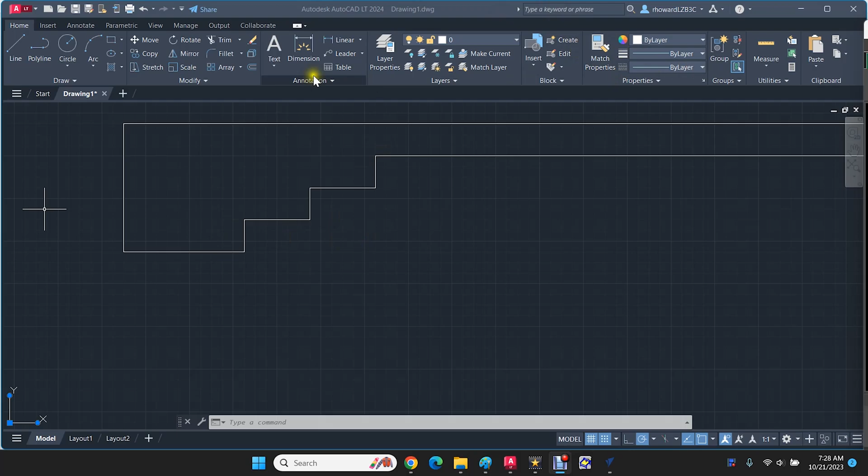Okay, so we're going to continue with the drawing process, and I've stepped away for about 48 hours. So what I want to do first is dimension these so I know where I'm going to put my guidelines in VCarve, actually. Let's take a look.

Dimension. Okay, so I've got 11/16 on that. Then I know I've got 3/8 there. Drag that down a little bit.

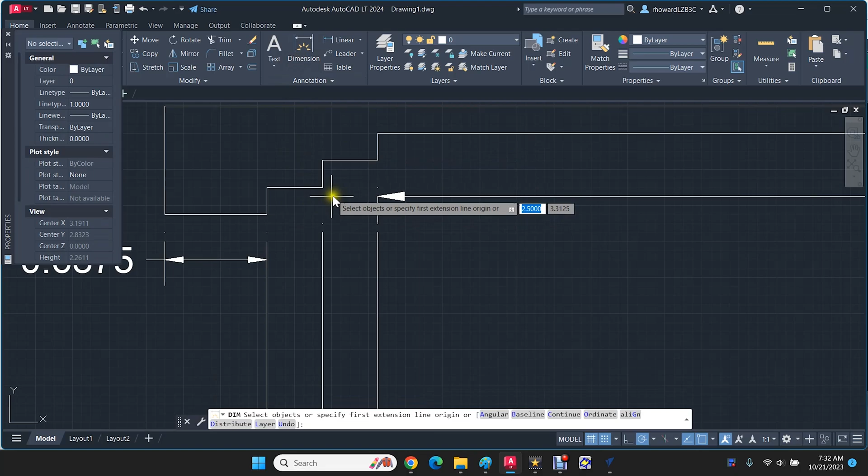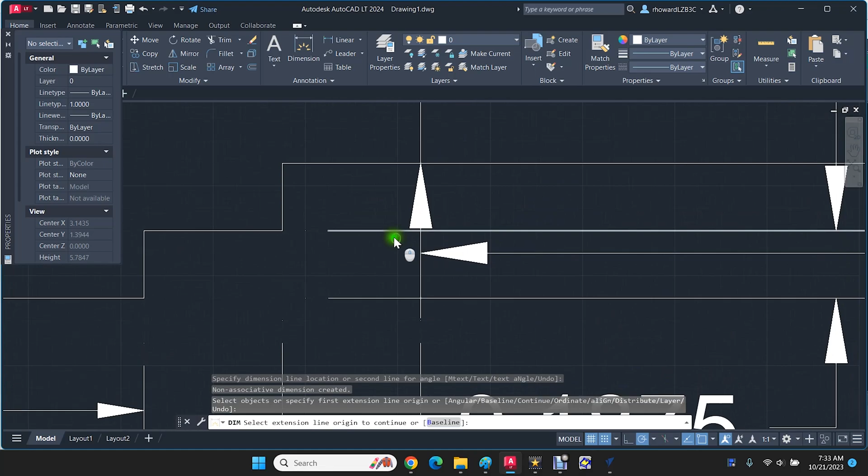You'll have to forgive this garish drawing, but it does reasonably serve as evidence of what's happening, even though this stuff's a bit goofy. Let it be known that I'm not a quick user of AutoCAD, but nonetheless it does allow me to see my dimensions, even though it's a sloppy drawing. Nothing a little practice wouldn't take care of.

So we know that we've got a 3/8 offset everywhere. We've got, in the horizontal steps, the vertical steps are going to be 3/16. Okay, so here, here, and here. That allows me to visualize what I did because I haven't touched this in 2 days.

Three-quarter thick, okay.

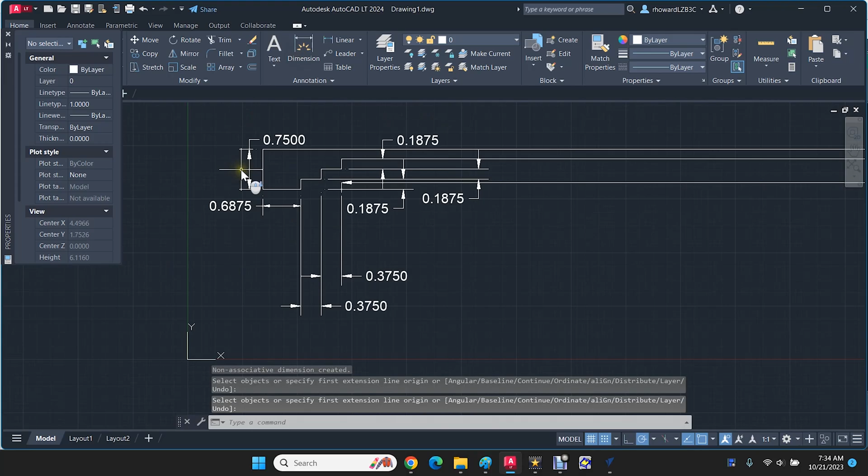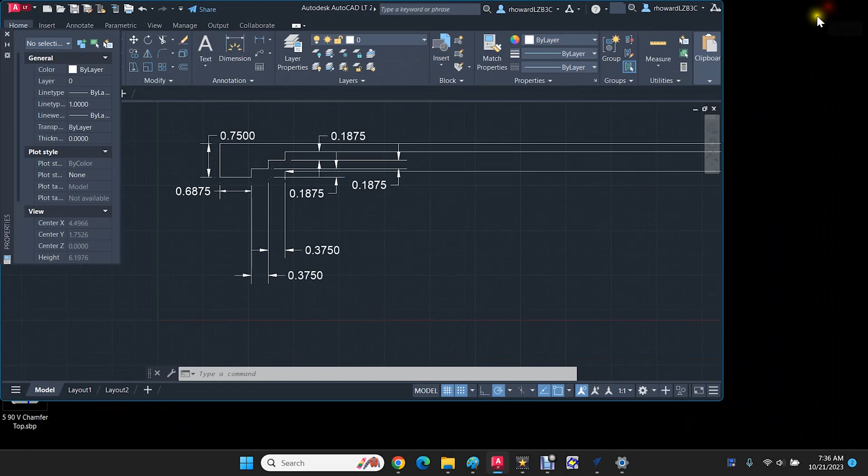Okay, now that we've got this, we have kind of an idea of what these dimensions are going to look like. I'm going to take the AutoCAD and simply move it, and we'll pull up VCarve, come back to our drawing. Okay, so the thing to do now is to draw guidelines for where our pocketing tool paths are going to occur. So if you recall, we're going to bring a guideline here to 11/16, another one here at 1 1/16, 1 7/16. And it'll be really easy to do that because of our relative-to-guide trick.

So we're going to click, I'm just going to focus in on one ceiling tile because my intent is to copy once I build it once. So we're going to create a new guide, relative to guide, and we're going to offset it 0.6875, create new guide. Okay, that gives us the first guide.

Now I'm going to create two guides that are going to be offset 0.3875. What my intent is with that, to bring AutoCAD back over, is I've got now a guideline here. I'm going to create one here and here for those two guides. So create new guides. And there they are. Close. So this is our outside profile. This is our first guide.

Something's not good on that one. What do we do there? Let's study this. Something doesn't seem to make sense. This should be 3/8.

So here's our first. Let's create another one. So this dimension is 11/16. Let's create one more. Well, first of all, I had the dimension wrong. It's not 0.3875, it's 0.375. Boy, that'll make your finished product wrong. So 0.375. Oh, you know why? Because what am I doing? Am I referencing off the original guide? That's the problem.

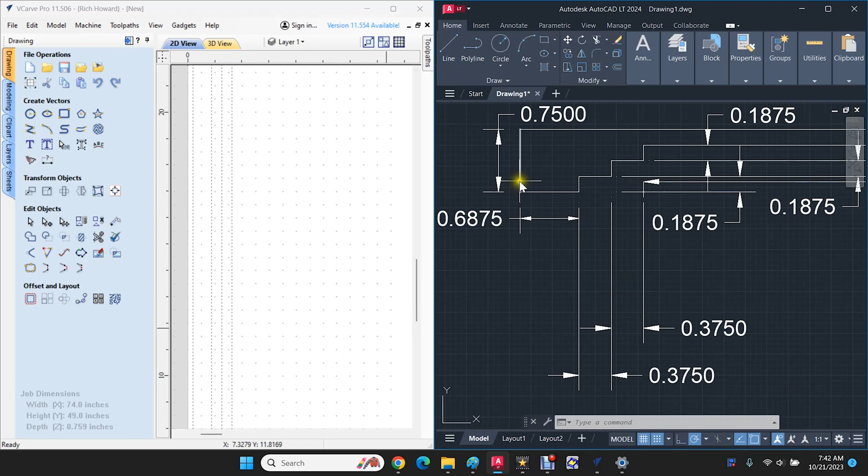I've got a guide for here. I've got a guide for here, here and here. I've got a guide for here and one for here. Okay, awesome. So now what we need to do is to do that on this side here.

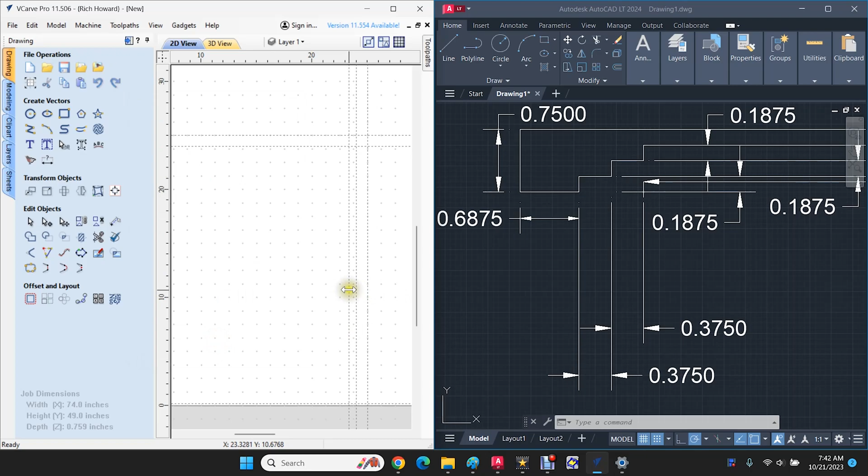Now this time, relative to guide, quantity 1, we're going to enter negative 0.6875, create new guide, close, because I'm not doing the math in my head to offset them from the original guide by the additional amount. Relative to guide, quantity 2, negative 375. Create new guides. There they are.

Is that right? Yeah. Wait a minute. 1, 2, 3. Yeah, we should have 4. Perfect. Close.

Okay, so now we need to create those same guides from this vantage point and from this vantage point. You can turn on and off the guides by that little button up in the top. So let's get to that.

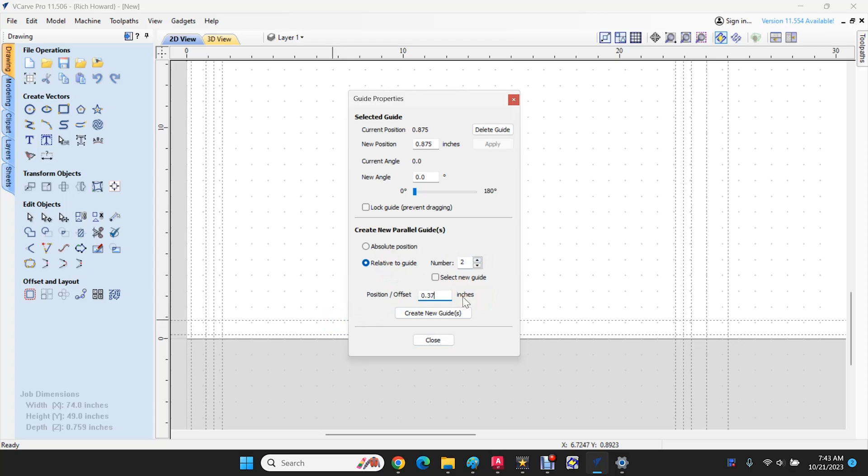Let's create new guide, relative 1, 0.6875. Create new guide. Perfect. Close. Relative to guide quantity 2, 375. Create new guides. Awesome. Close.

Down from here. So relative quantity 1, negative 0.6875.

Oh, you know what? I think you can do simple math in this. Let's try it. I think it needs to be parenthesis, minus 0.375, close parenthesis, equal. Yes, that worked. Create new guide. I guess that will only work one time. Or actually, I can take that sum, home, parenthesis, minus 0.375, close parenthesis, equal, create new guide. Ah, okay, yeah, that worked.

Yeah, I saw that in a video somewhere, not online. Let me check that with our measuring tool here, just so I have a level of comfort that I did that correctly. I've never done that before. Yeah, that looks right, okay.

375, so I'm getting that in the upper right-hand corner, is where I'm getting that. And then this one, yeah, perfect. That worked. So now what's neat is I have guidelines for the first cell completely, and they're partially done for the second cell. My intention is to copy polylines, so I'm not going to draw any more guidelines.

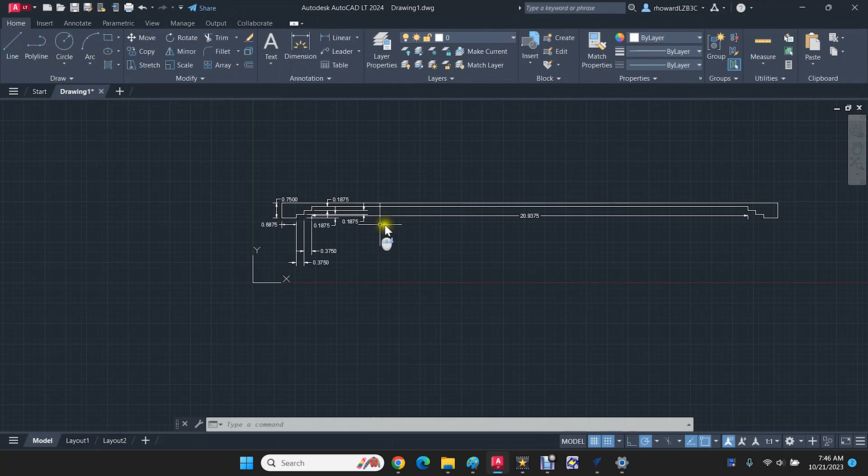And in fact, I could easily get rid of the rest of the guidelines, but just don't see a reason to do so. So what my intent is, we're going to create 3 pocketing tool paths. I'll do the inner one first. What I mean by that is I will do the inner path, the inner pocket first, from the material surface down here, which dimension is 9/16, if I've got that correct. Yeah, 9/16.

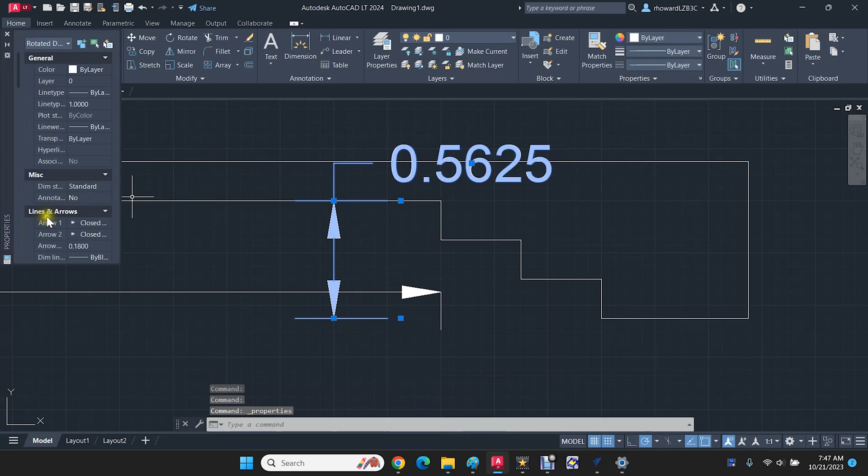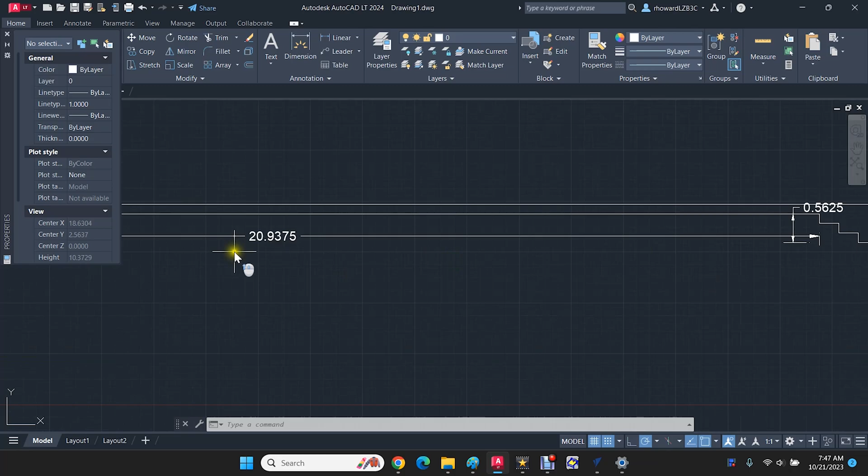And what I did earlier was properties. I made that a little bit smaller, 0.125, and then offset. That's less confusing, I suppose. So I'm preferring to pull up these dimensions. So I know that my pocket needs to be 20 and 15/16 by 9/16. So when I get that drawn, I can confirm that with my dimension tool here over to here, upper right-hand corner, indeed 20 and 15/16. Then from here,

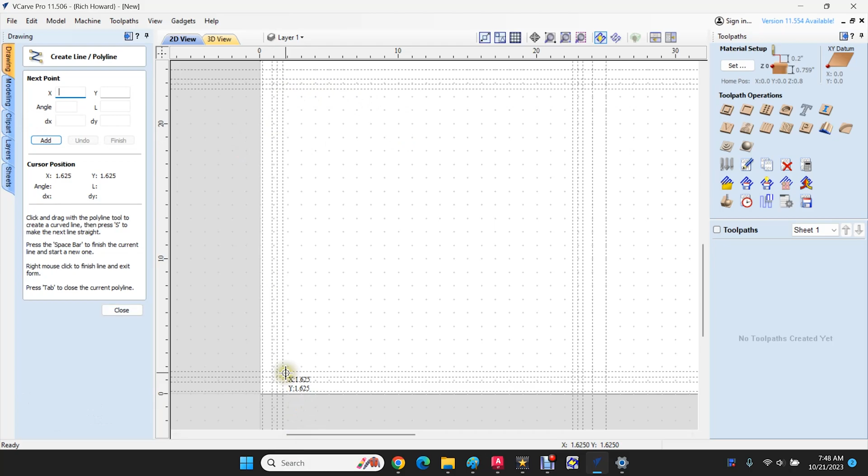There's a way to keep the tool active, I believe. Yeah, it's square. And of course, the height I can't judge here because I'm doing this in 2D. So what we're going to do is pull up the toolpath tab. Let's pin that. Let's create a pocket toolpath. But first, of course, I've got to create a vector. So we're going to draw a line, polyline. I'm going to start down here because I'm going to want it to start as close to 0,0 as possible. And...

Go here. I've been told, get good at scrolling, zooming in and out. Right mouse button exits out of there. So now I should turn off the guidelines. Now I've got a vector that's closed. Awesome. So now from here I can create a pocketing toolpath.

I don't want to use a 3/8 end mill. What I'd like to use is my surfacing bit. I didn't buy it for this purpose, I bought it to T-slot items, but I'm finding that it works. It's an Amana 45662, and I'm going to see if I have this in my tool library. Select surfacing end mill. Yeah, I do. Amana 45662, inch and 3/8, cutter diameter 1 and 3/8, 2 flute, pass depth is 50 thousandths, step over, 18,000 RPM. That seems awfully fast.

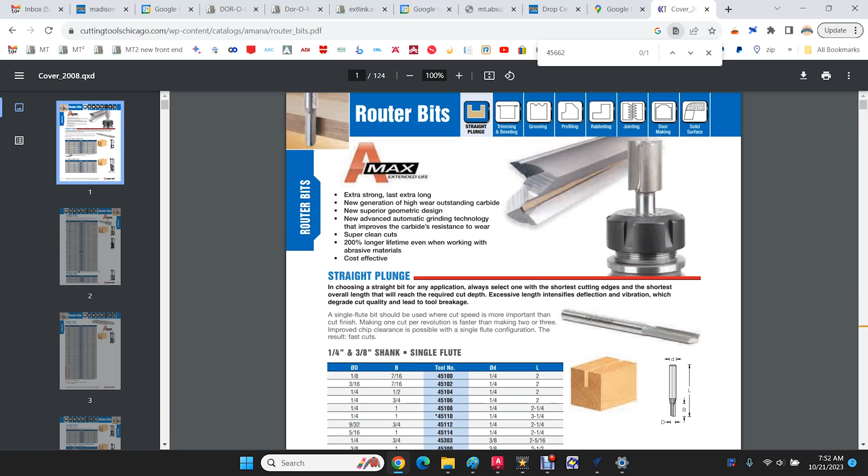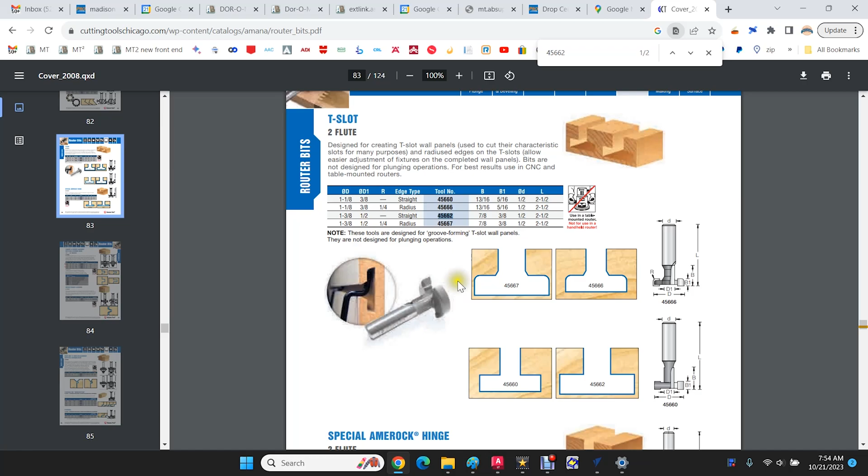Four, 5, 6, 6, 2. Yeah, that's my concern, they're not right for plunging. Because of the shape, it can't plunge. I may be able to have it ramp in, but I'm not comfortable having it nowhere to ramp. Well, you know what we'll do is we'll play with it. Let's see what happens. But the point of that exercise was, what's the RPM?

I'm going to abandon the idea of using this bit, because when I use it to surface my spoil board, what I'm doing is I'm starting off the edge of the spoil board, I'm not starting on top of it. And because this item is not, it's not going to plunge because of its shape, that's the problem. And what I mean by that is, you can see in the design it can't plunge, but it's not going to work. So we're gonna keep our end mill.

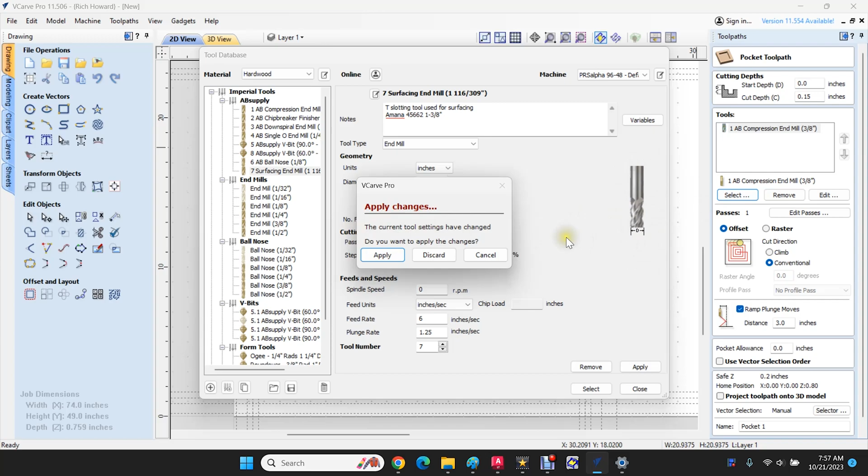I don't know if I have a larger end mill, and the reason I'm thinking about the bit is I don't want to be here till the 23rd century. I just don't have a half-inch diameter end mill, so the 3/8 end mill is what we're running with. Had I thought about this beforehand, I would have brought in a larger bit, is what I'm driving at. Because I'm going to be pocketing with a 3/8 bit, and I've got 20 and 15/16 on the first pass, so discard. We're going to leave that.

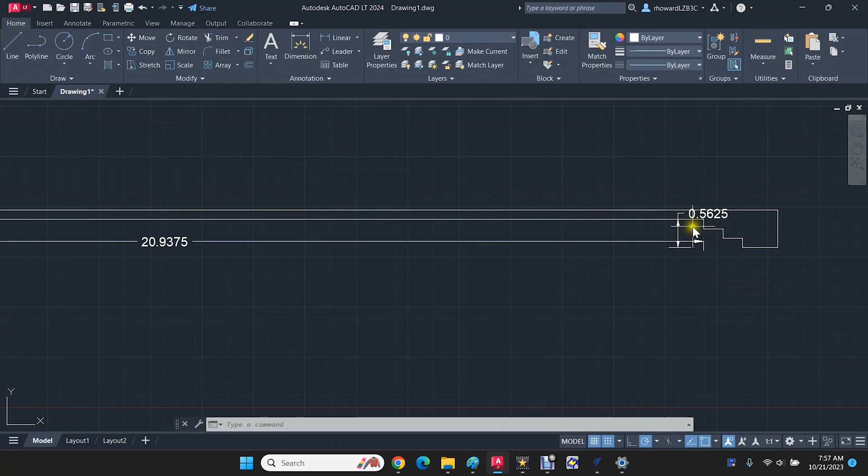Now our start depth, we'll make that 0. Our cut depth, now this is where AutoCAD comes in again. If you recall, I could be doing it on a calculator, but it's 9/16 of an inch. So we're going to make this 0.5625. Yeah, we'll raster cut that.

Plunge, ramp, plunge moves, 3 inch, okay. Safe Z is 0.2 inch. Yeah, that would be fine. Now, it's defaulting at 2 passes. I don't think there's any reason to change 2 passes in MDF.

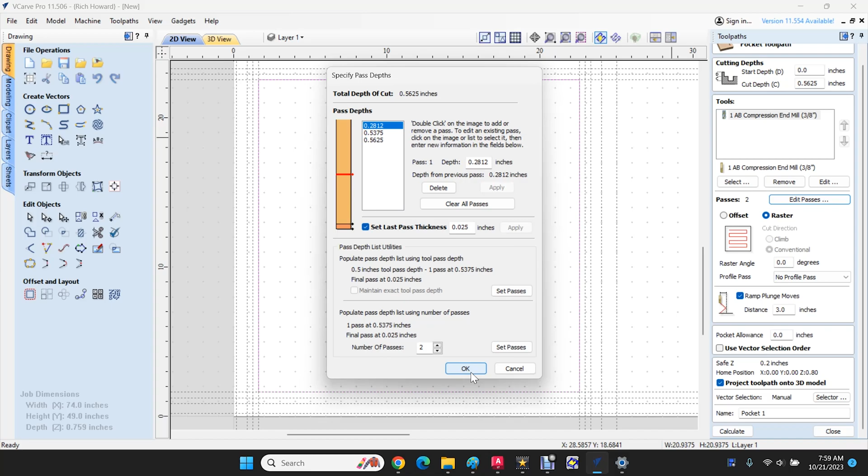So what I'm doing is setting a last pass. It's my understanding that a last pass is going to potentially make it cleaner. I've not experimented with that, but we're going to do that now. Pass 1 is at 4, 8, 9/32 of an inch. We're just going to experiment, see what happens. But I'll put a clean last pass on there, which is basically 25 thousandths.

So we'll say pocket 1, inner, we'll call it, and calculate. Yeah, looks about right, speed that up a little bit. So it's doing the first pass, obviously, second pass. Third pass, and I sped it up even more. Okay.

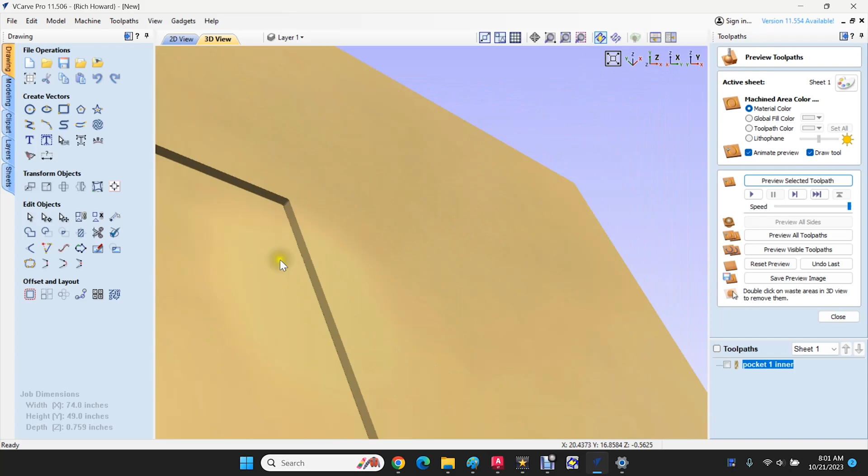We're going to have a radius corner, obviously, 3/16. I did think about a smaller diameter bit to give me a tighter corner. I just don't think it's going to be a problem. If I don't like the design of what this is going to be, or is not what the client wants, so to speak, we'll make a modification. I'll do a tool path with a much smaller bit, then come in and pocket the rest. We'll see.

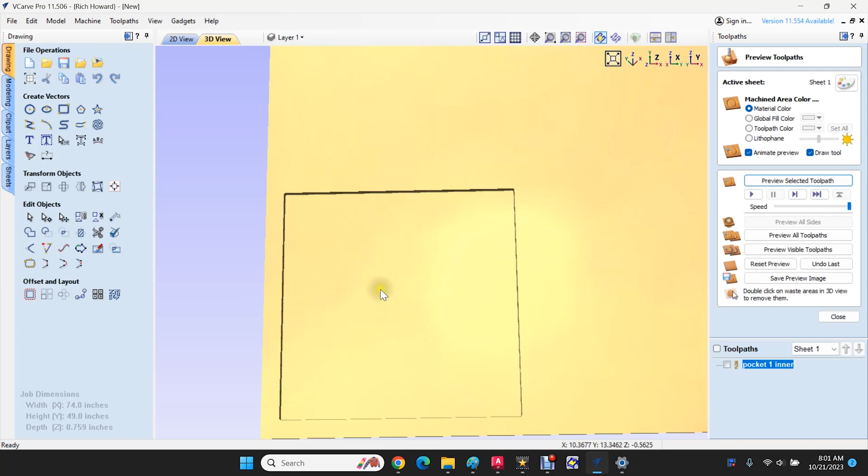So what you can see here is in this area, when I put my mouse over it, you can see where the mouse is in relationship to the X and Y, but also in the Z, it's saying negative 0.5625, 9/16. So that's exactly what I wanted to see. That looks like it's going to work. That's the first tool path.

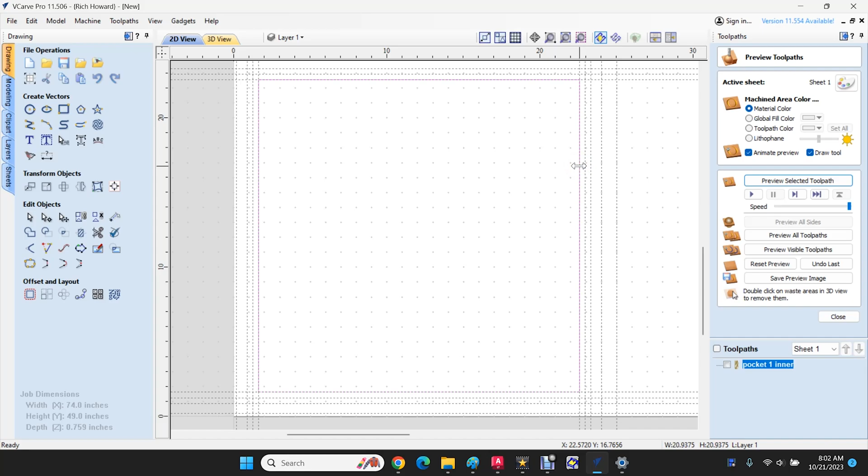Now we'll go back to the 2D view, and we're going to draw another polyline. Well, that's not what we want to do. No, we're doing this in reverse order. So what I mean by that is we're doing it backwards, in the sense of I don't want to do the inner one first. I want to do the outer one and go only down to the 3/16 step, and then continue to step in, and then give a last pass on the third innermost pocket.

So this tool path is wrong. If I did it in this order, I would pocket all of this, then I would be air cutting the majority of the second step. So it's okay, it's just simply a delete this, just simply an exercise. I still have my vector, and that's okay. I'm going to leave the vector.

Let's actually delete the vector. Okay, so let's start over from the outermost pocket, which is going to be here. 1, 2, 3. Okay, so let's do that.

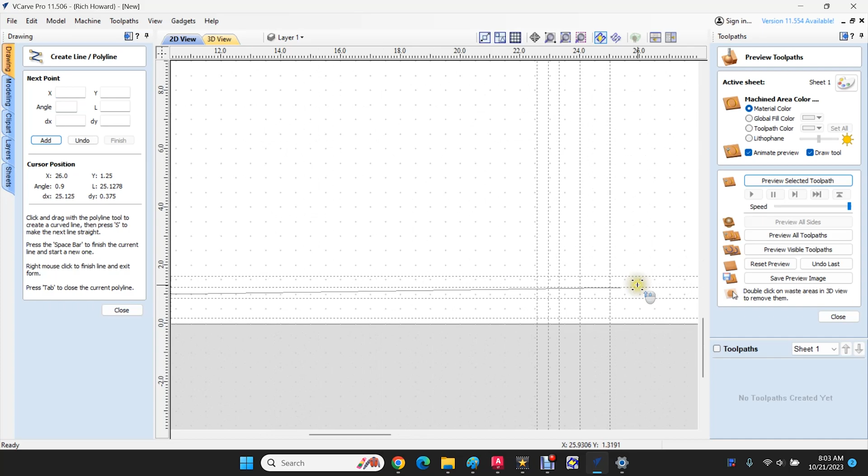Nope. Node editing mode, bring it up to here where it's supposed to be. We're going to have to check these lines to make sure I've got them in the right location. Turn off the guides. I'm going to select these and I'm going to group them. I'm used to typing in group. There it is, okay, so I've grouped that.

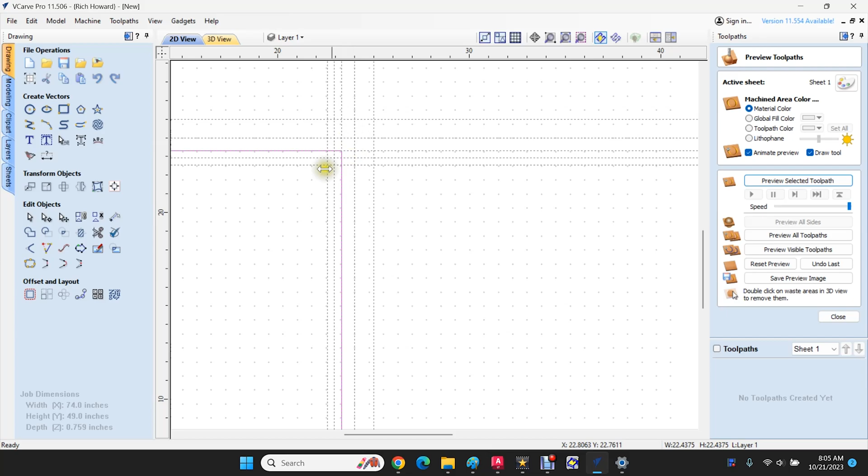Okay, that's fine, so now we have a vector. Let's throw our guidelines back on. Yeah, looks good. So we're going to draw the 3 stepped pocketing tool paths, and at the end we're going to draw the profile, which we will use to cut the piece out of the solid piece of MDF. So let's draw, well, actually, no, let's close that.

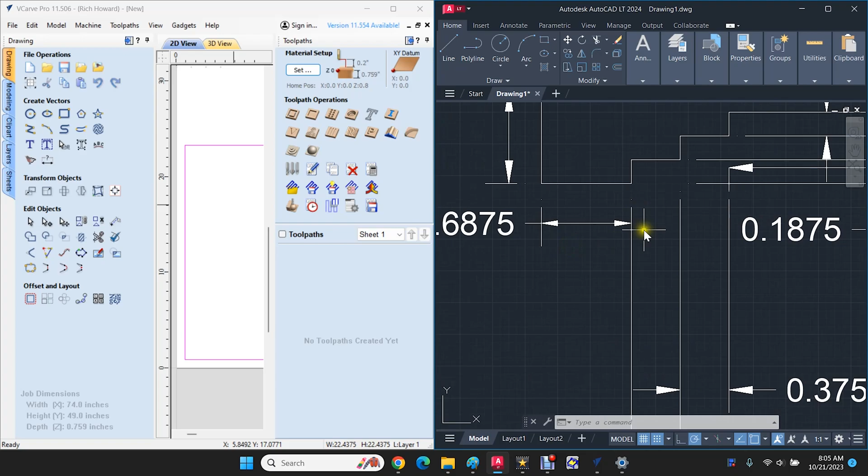Let's do our pocketing toolpath. Now, this is where we have to think about, we'll have to have AutoCAD back up so I remember the dimensions. Okay, so we're on the outer unit. We know that we're going to go 3/16 down, and then we'll have to get a dimension on how wide that pocket's going to be. So let's dimension that, it's going to go from here to here.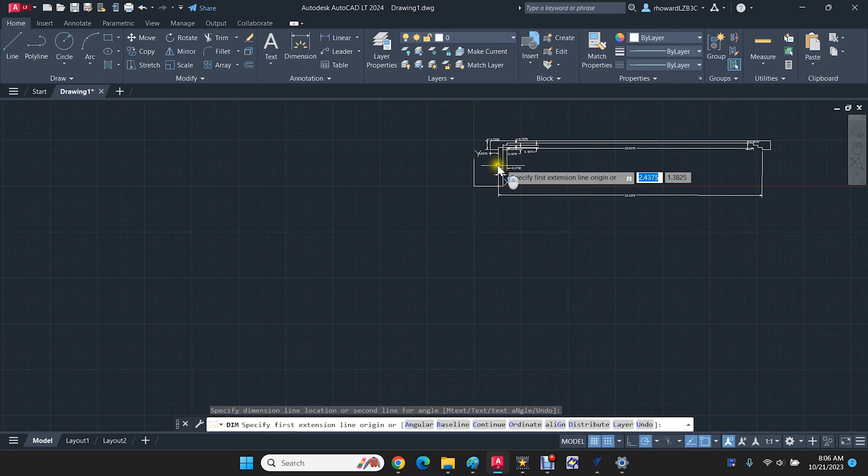Drag that down. 22 and 7/16 is what it's going to be. Actually, I don't have that lined up really well.

Yeah, we got it. 22. Yeah, 22 and 7/16. It was giving me a dimension that wasn't exactly what I expected. But yeah, so it's 22 and 7/16 wide and 3/16 deep.

So let's put that aside, literally. We've got our vector highlighted. Let's pocket a toolpath. The cut depth is going to be 0.1875. One pass is going to be perfect for this, I think. We're going to raster.

Outer pocket. 22, 7/16, by 3/16. I'm going to name it that. I'm not sure why I'm putting it in imperial and metric or decimal. Outer pocket. Okay, calculate.

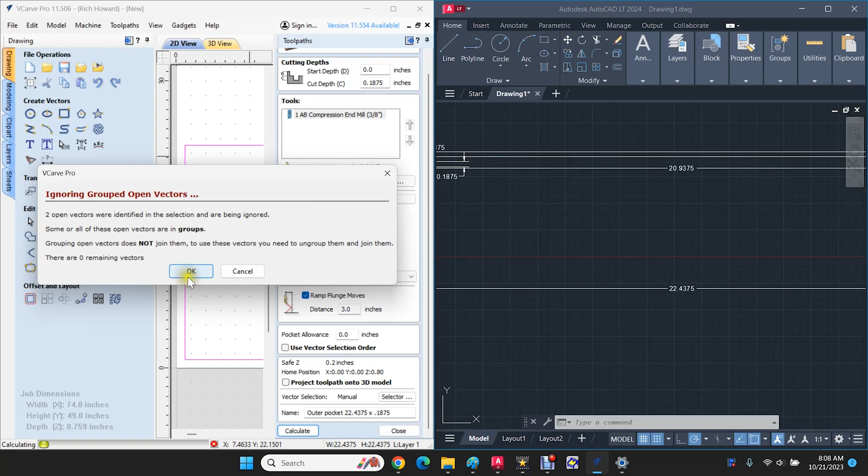2 open vectors are identified in the selection are being ignored. Some or all of the open vectors are in groups. Grouping open vectors does not join them. Okay. Yeah. Okay, so let's take a look.

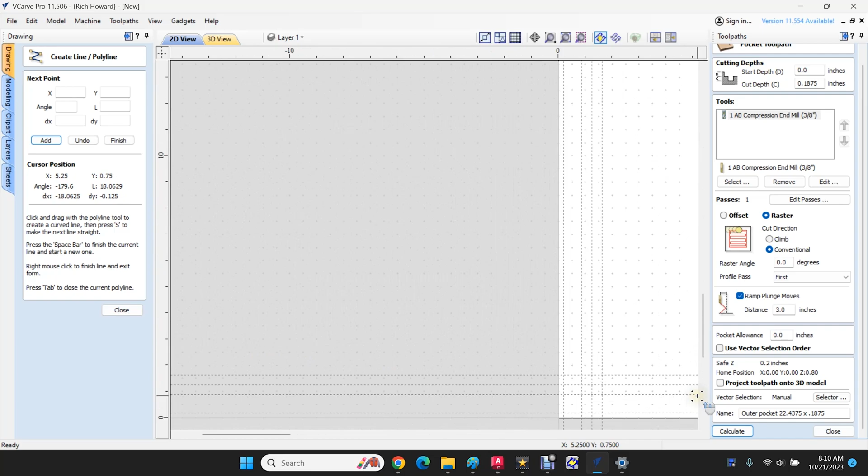Let's just redraw it. Okay.

Yeah, this 24, and then it was... I pinched that guideline by mistake. So that's going to be 11/16.

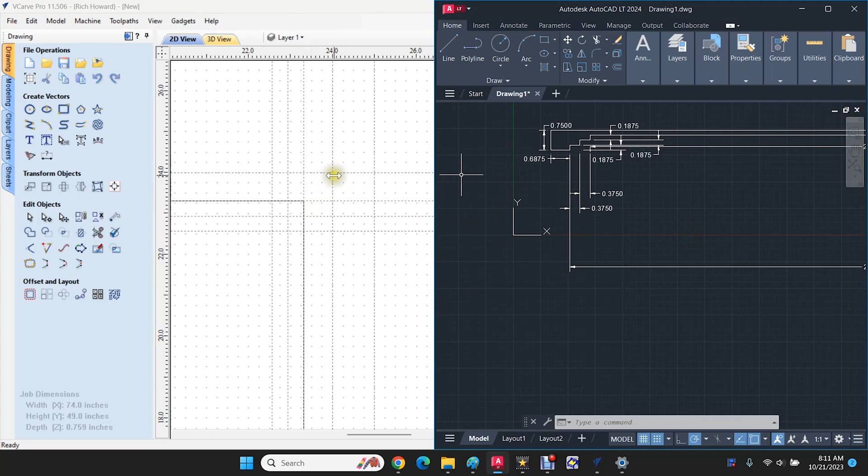So that guideline needs to be 23 and 5/16. Right mouse button, 23, 3125, apply. That didn't work.

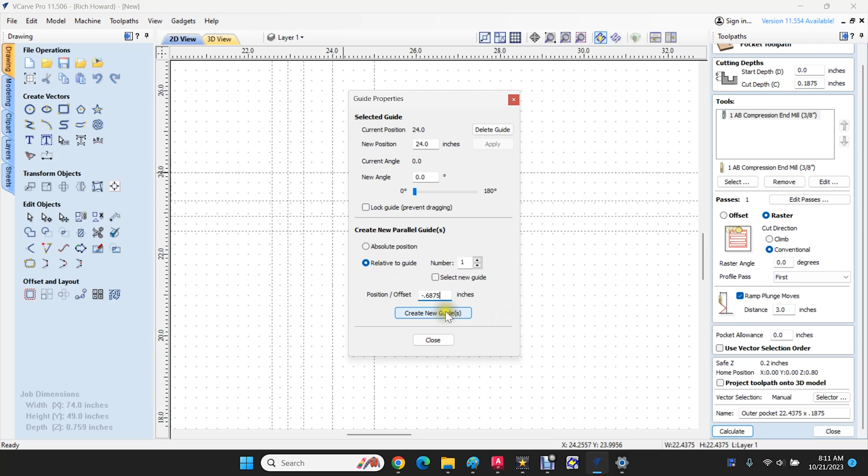Relative minus 0.6875. Okay, I see what I'm doing.

I actually have the guide already there. Relative 23.3125. Close.

Okay, I've got guidelines for what I'm doing. Okay, so let's back to where we were. When I undid the operation, I undid the vector that I drew, or the polyline.

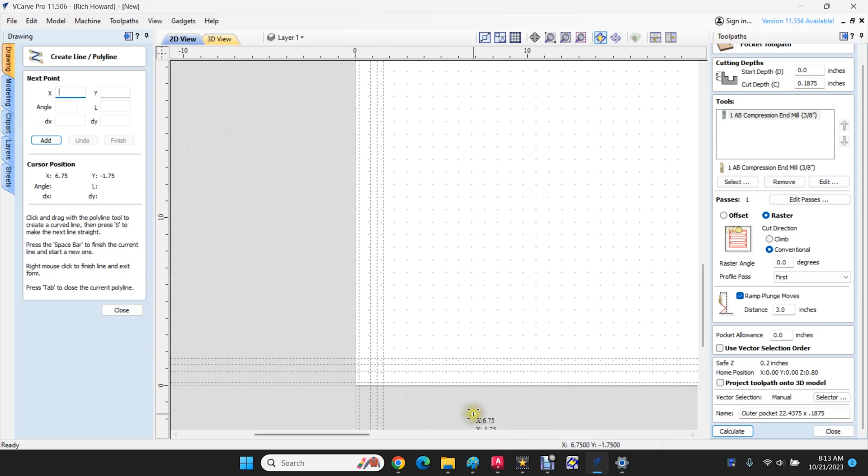So let's draw a polyline. Let's get to here, to here. Okay, we've got a polyline. Looks like it's in good shape.

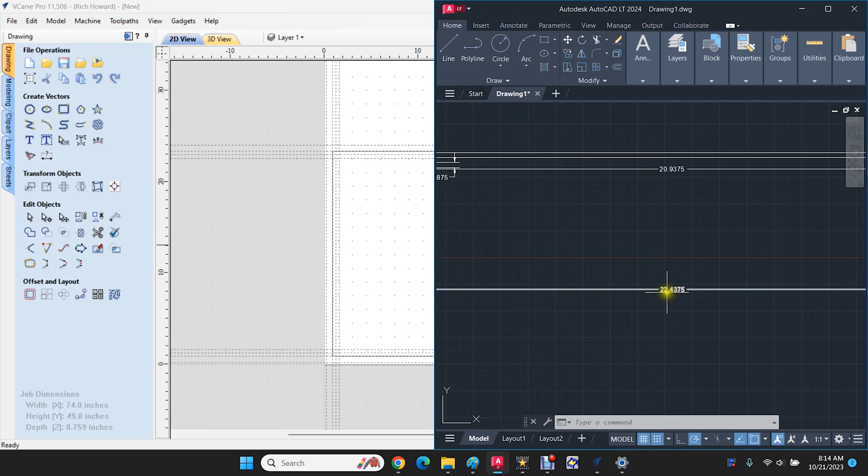We know that it's supposed to be 22 and 7/16, and then 3/16. So let's maybe do a reality check on that. Yeah, looks good.

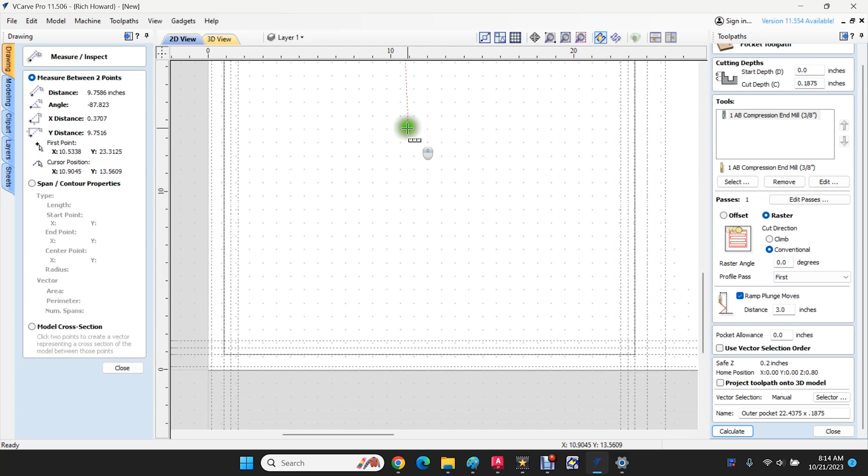Let's go vertically. Yeah, looks good. Okay, and the depth we can't check. We'll check it in our 3D view though. So let's turn off the guidelines.

Let's select it. We know we're doing a cut depth of 3/16. It'll be one pass. We will raster cut it. And based on the compression end mill, I'm going to want to climb cut this because of the orientation of twist, so to speak, on the end mill.

We have a name for it. We've got a depth. Our vector gives us the x and the y dimension, and we will calculate. Well, let's see what we get. Okay. All right. So we put our cursor in here, and you can see down here we've got 3/16 depth.

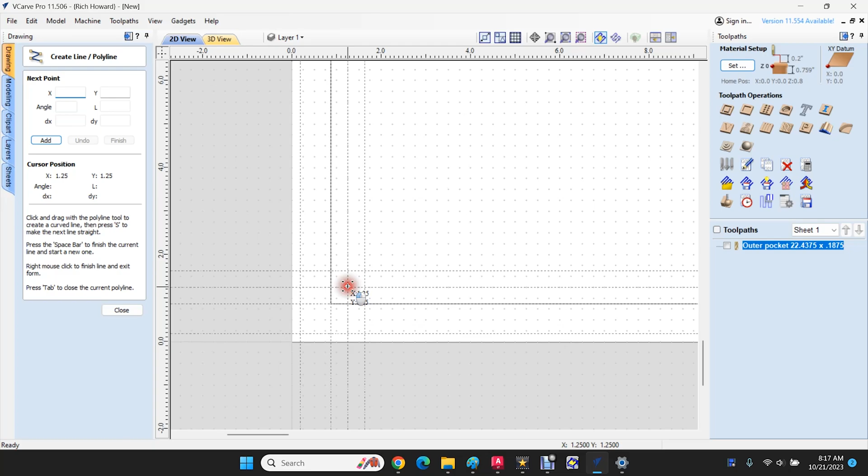Okay, so I'm satisfied with that. Let's close. Let's bring in our guidelines. Let's draw our second vector. All right, I like that one. Turn the guidelines off just for the sake of viewing this. Now let's select this vector.

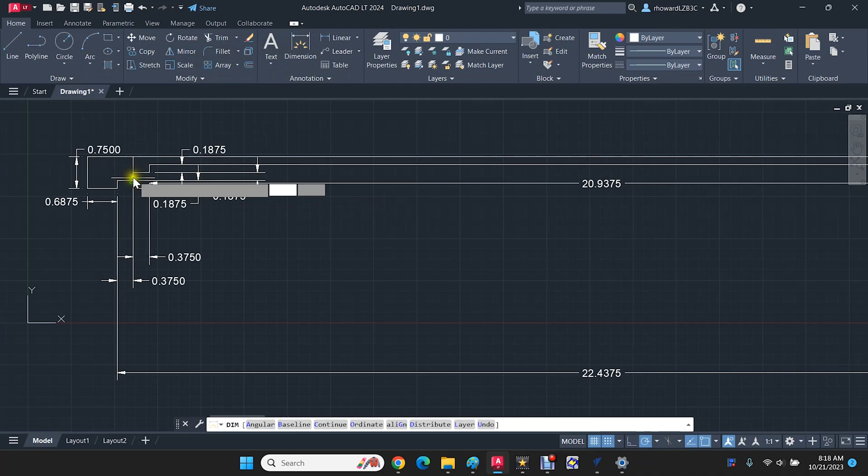21 and 11/16 by 21 11/16. I could just dimension that quickly in AutoCAD. Actually, why don't I? Why wouldn't I? So now we're in this second step area, here, over to here. I'll drag it down. Yeah, 21 and 11/16. So I'm liking that.

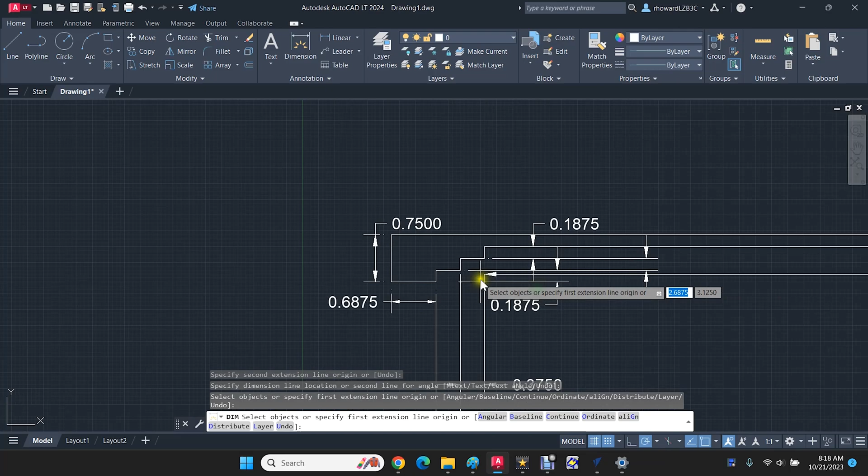All right, we've got it highlighted. Now let's create a pocketing toolpath. Now this time we're going to want 3/8 deep because we're going in another 3/16. We've already cut to this depth. Now we're going to go to this depth, and it's going to be 3/16 plus 3/16.

I can draw that, dimension that. If I extended this dimension line over, it's going to come over to here. So we're good. That's 3/8 deep. So we're going to change this to 375.

Same bit. We're going to climb cut. We're going to raster cut. The other dimensions are good. Our safe Z is okay because we're starting from the top. I could be giving it a start depth of, let's go 0.15.

So it's hanging off the top of that area ever so slightly. So I'm basically going to be dropping the bit down is what I expect to have happen slightly. What I don't know is where is Z referenced? Well, it's got to be from the top of the material.

What I'm concerned with is, are these cumulative? Will these be added and give me a deeper cut depth? I'm going to leave it at 0 for now, and I'm going to test that at some point in the future, is what I'm going to do. I realize we're going to be doing a lot of air cutting here, but we're going to test that.

So we're going to climb cut, we're going to raster. This is going to be middle pocket. 21.6875 and then 0.375. Calculate.

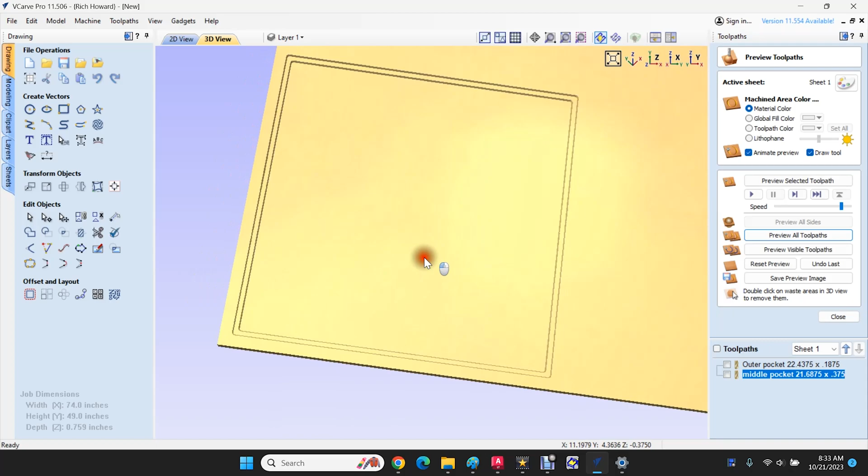Yeah, it's good. So my mouse is in here and it's at 0.375, and over here it's at 3/16. So I'm liking that. That is the intended look.

Okay, 2D mode. Let's bring back our guidelines. Let's draw our final polyline. Well, not our final polyline - it'll be a little bit easier now because we've got stuff to go off of.

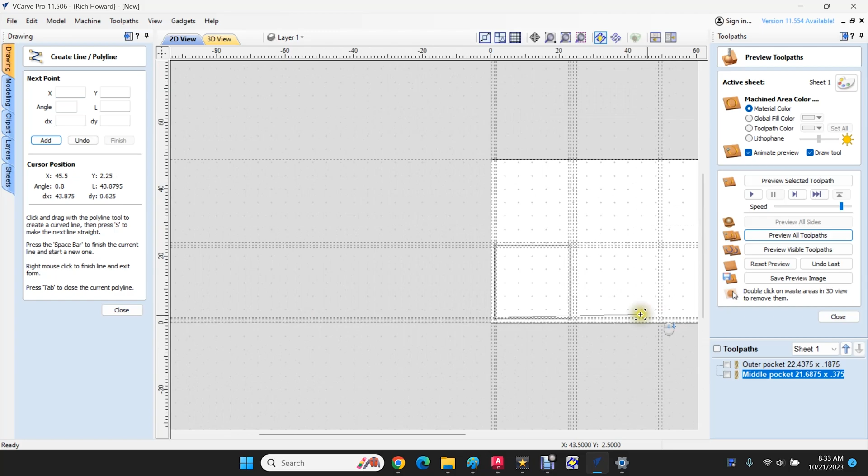Beautiful. Escape. Let's center that work. Let's get rid of the guidelines. Let's select that newest vector. Let's close. Pocket.

0.5625. I'm going to climb cut. Raster. Name - this is going to be inner pocket.

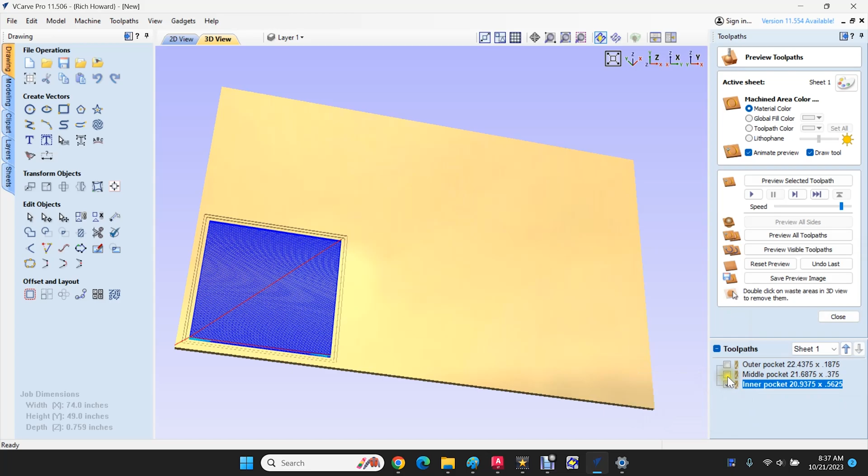Now we know that this one's going to be 20.9375 by 3/16 times 3 is 9/16. Calculate.

Let's preview selected toolpath. Yeah, that's a problem because it's making multiple passes now and it's air cutting so much of it. So we're going to experiment with the start depth on that. I just want to be sure first.

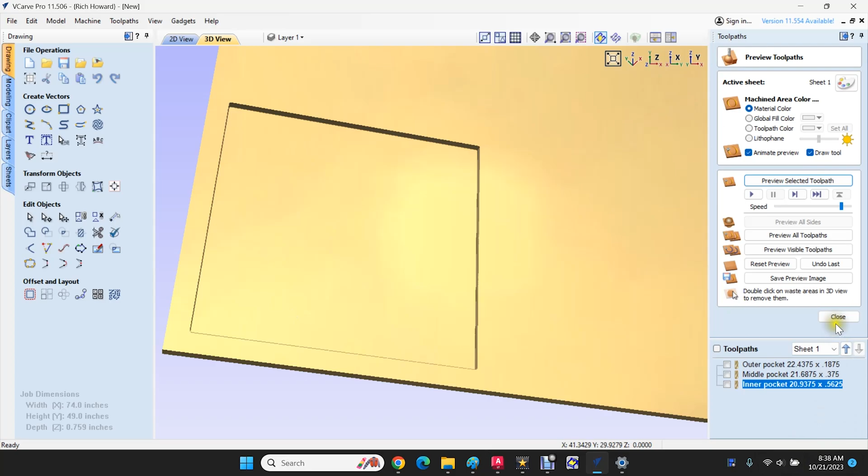Okay, so it did it in 2 passes, but this time what I want to do is here, it's highlighted, pocket, edit passes. I want to set a last pass, 0.025, apply. Because it's my understanding that last pass gives a cleaner cut, and I don't have experience with it, but that's what I believe it to be.

All right, what I want to do is copy this. I want to rename it, I want to copy it. I now want to edit that tool. I want to change the passes. Set last pass, 0.025, apply.

Okay, I'm going to name it - oops, I'm going to name it my inner pocket. I'm going to calculate. Now it gives it to me at the bottom, and this one I'm going to go back and delete. I think I deleted the right one.

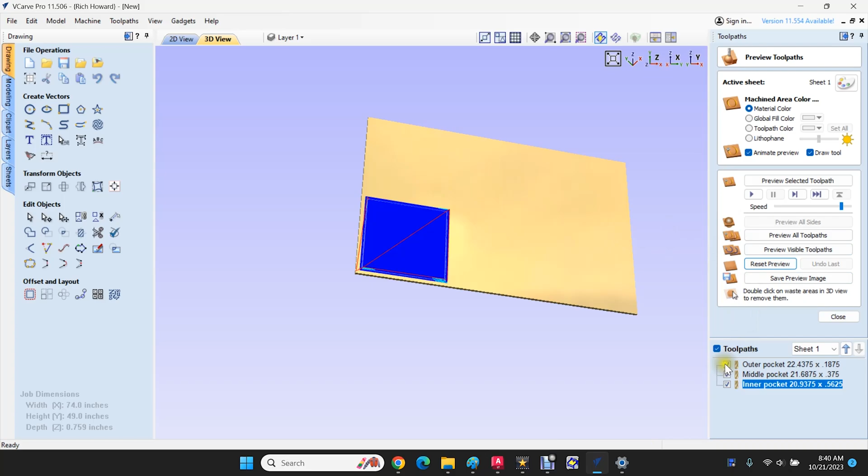No, actually, yeah, we're gonna experiment with that. Reset preview. So it's my understanding it's doing it in the order in which the tool paths occur. So we're doing the outer pocket first, the shallowest depth. We're doing the middle pocket next, which is deeper. And then it should come back and do - let's see what it does.

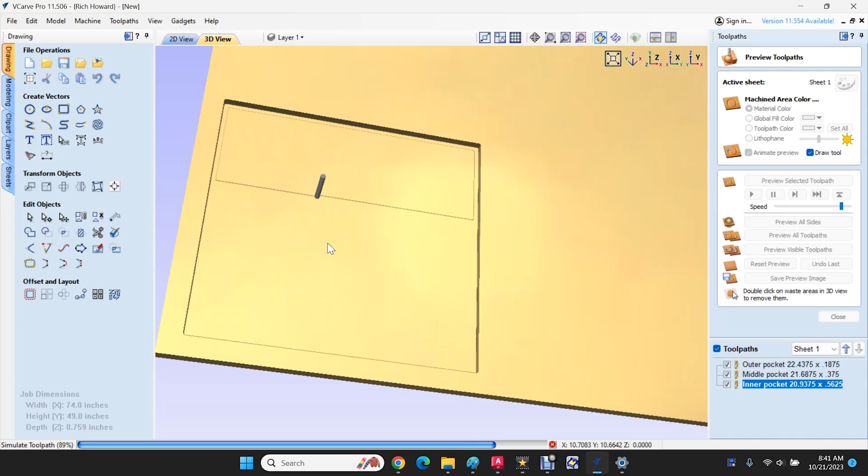All right, not what I expected to see there. What are we seeing? We're seeing the inner pocket, which is highlighted. Let's reset the preview. Preview all toolpaths.

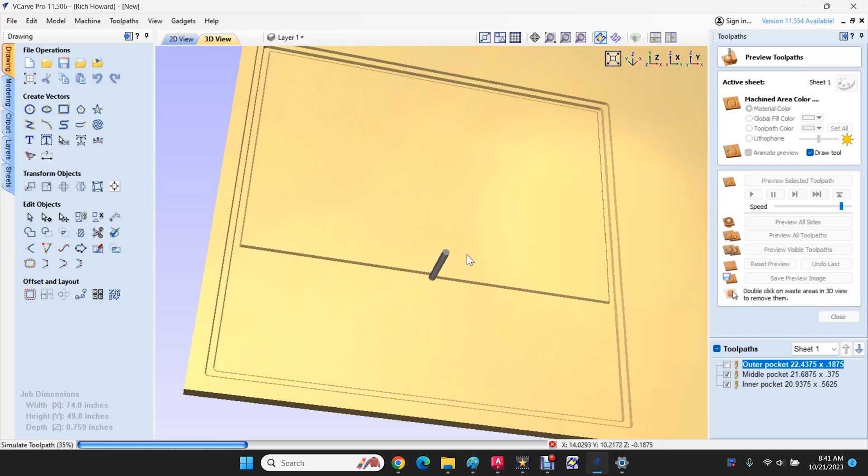Second - oh, okay, so it unchecked. You may have noticed that it unchecked that. Let's see if it unchecks the second one when it completes the middle pocket. Oh, it does. Yeah, okay.

So it unchecked that. Now we're running and we're air cutting. So that's why you're not seeing any movement of a tool, because we're literally too high in the air on the first pass. This is the second pass.

Last pass, really thin pass.

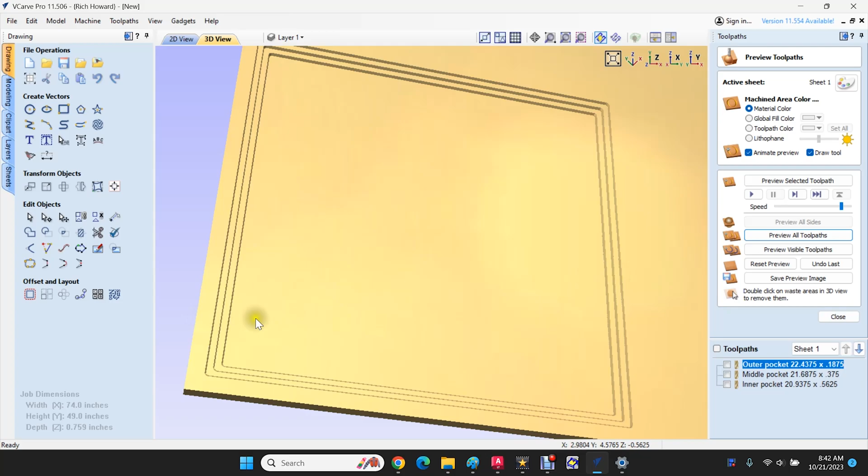All right, looks right. Mouse here, 9/16, mouse here, 3/8, mouse here, 3/16. Okay, doesn't look awful. Now, the final thing I want to do is a profile path.

So let's go back to our 2D. Let's bring in our lines. The last thing we're going to do is make a profile path, and that's going to be on the outside.

We do have a vector highlighted here. That's why it looks that way. Escape. Bring in our lines.

Now, our profile paths - here to here.

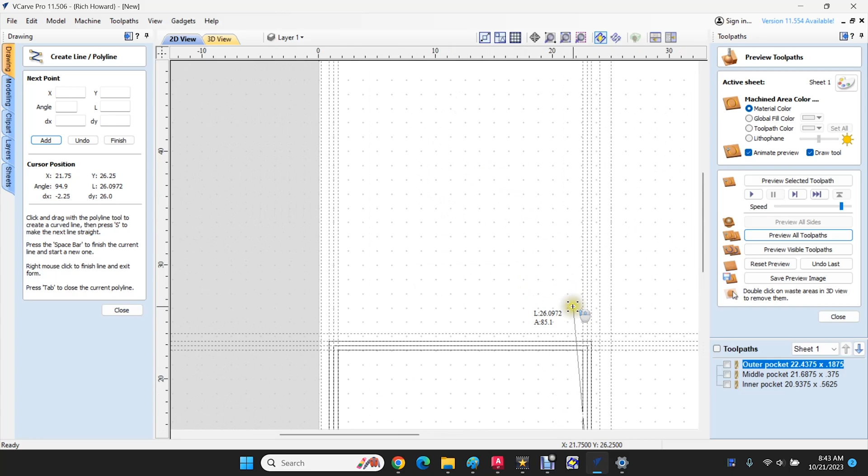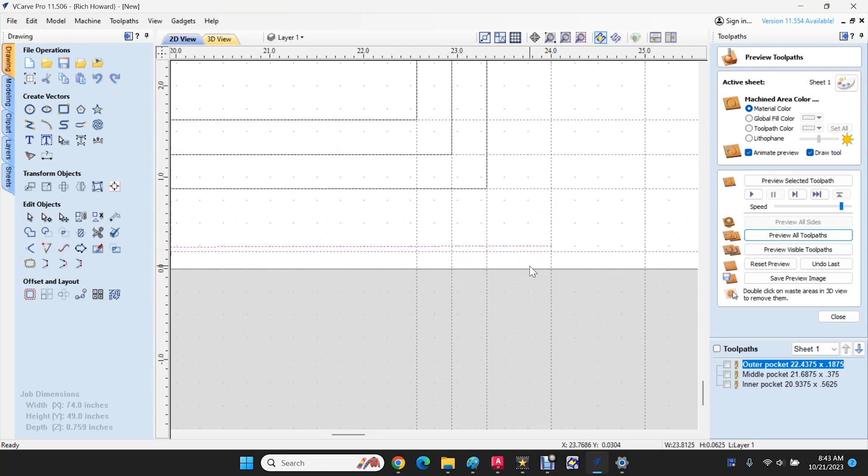Something's not right with that. Because that, yeah, okay - I didn't draw the line right. And what tipped me off was the dimension was showing 23 3/4, and I know that these panels are 23 13/16. So let's try it again.

That looks good. Here, here. Let's highlight only that vector.

Close. So now we want to breach through the material. And our material is 0.759, if you recall. So profile toolpath, cut depth, 0.759.

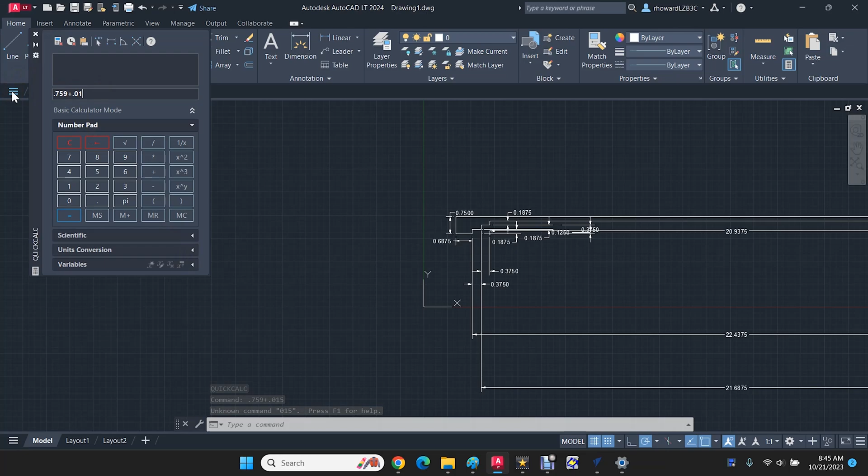There's got to be a calculator function in this. I don't know where it is. 0.759 plus 0.015 - 0.774. Great.

0.774. Now it's going to tell me I'm going to breach through, but that's okay. I've got my spoil board underneath. Now we got our same end mill.

Machine vectors outside to the right or inside to the left. We want to be to the right of the line, and we're going to change it to climb cut again, staying on the outside of our line.

We're going to say no to tabs at this time. We're going to ramp into it, going with a 3-inch ramp.

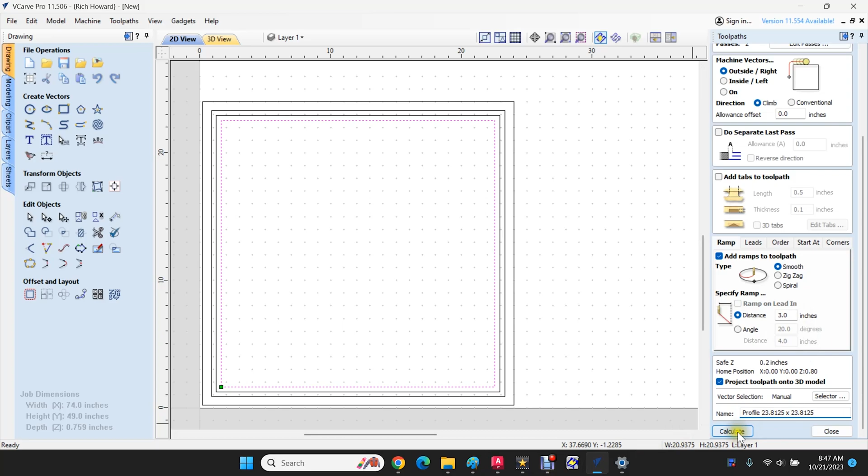Profile, 23 and 13/16 by 23 and 13/16. Let's calculate. Okay, that's normal. It's telling us it's going to cut through by 0.015.

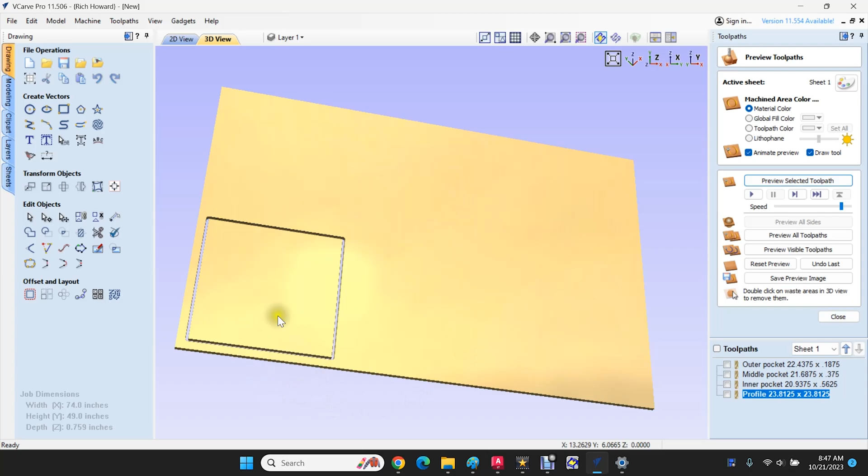Let's preview the selected toolpath. So it made it in 2 cuts, which is fine, and you can do a last pass on this as well. You can see this time it breaches through.

The issue I have is I've got this MDF sitting on top of a sheet of MDF, and then the spoil board where the plenum is underneath. I don't know if this is going to move. We're going to find out.

Actually, what I'd like to do is close this. I'm going to edit the quantity of passes. I'm going to do it in 3 passes, and set a last pass at 0.0.

Well, wait a minute. What I want to do is put the least amount of stress on the materials, cutting through it at the end.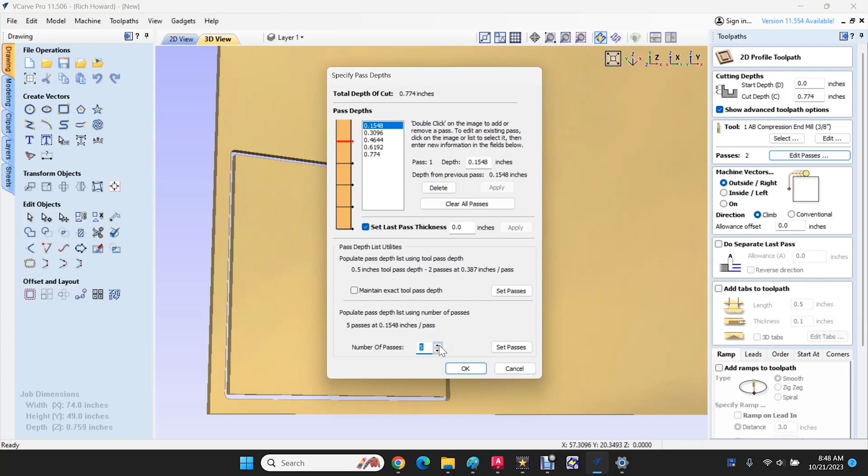Calculate, yeah. And then what we'll do is we'll take this, rename, Control C, this, we'll rename, Control V, we'll delete this one, because it's creating a copy every time you make a modification.

Reset, preview, preview selected toolpath. Okay, well, let's do this. Reset preview, preview all toolpaths. Let's let that run. Now we'll speed it up just to get it done.

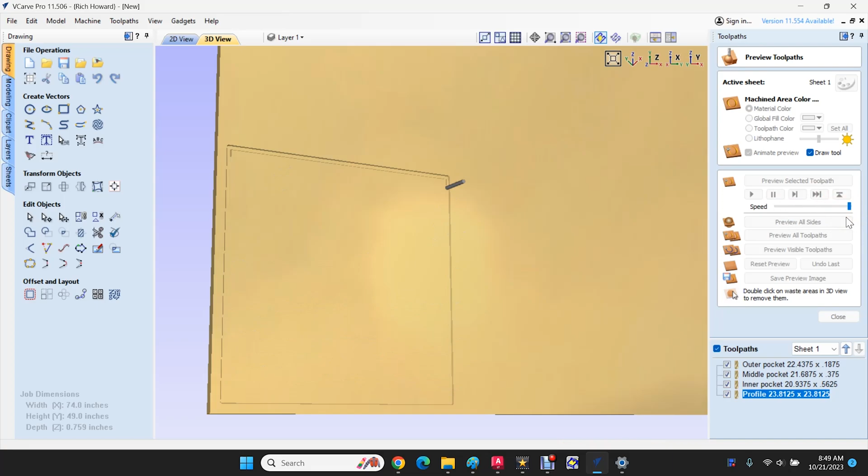That doesn't seem right. What do we do there? It's got to have, what do we do there? Let's figure it out. All right, so let's figure out what we did wrong on that profile.

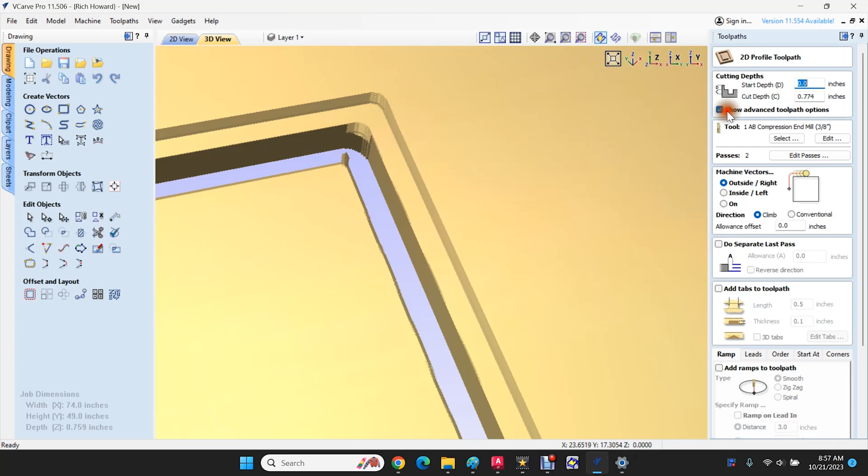Close. Sure what's cutting through there. Let's close that.

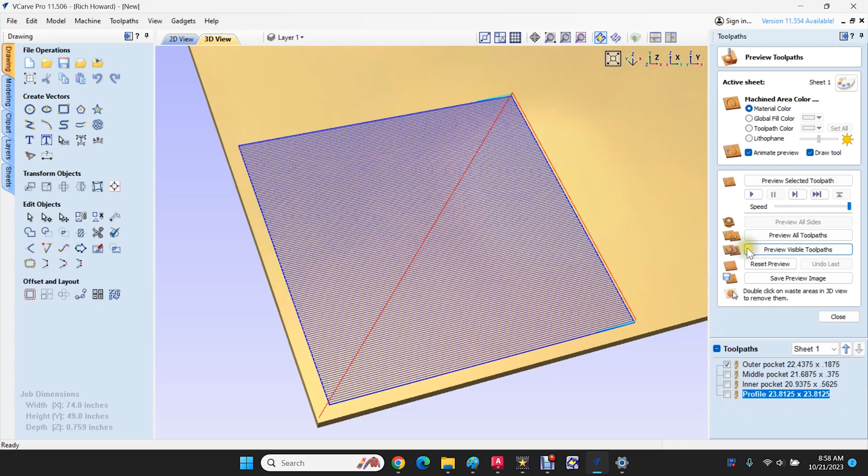All right, so we've got that profile in the wrong place. Wonder why. Ah, because I must have highlighted the wrong vector.

That's the vector that we need to profile. So I highlighted the wrong vector is what I did. All right, so let's...

Rename. Let's Control C. Let's delete this. Let's highlight only the vector that we want. Close. Profile. Got the right depth, retain that, right bit.

We're going to climb cut on the outside to the right. Ramp, 3-inch. We save that. Project toolpath onto 3D model.

Let's do that. Give it its name. Calculate. It's going to cut through. We know that. Okay, yeah, it looks right. Looks better anyway. So now what?

Let's preview all toolpaths. Okay, that looks right. Oh, never mind. I selected only the one, but it looks like it's only giving me 2 passes. So let's close that.

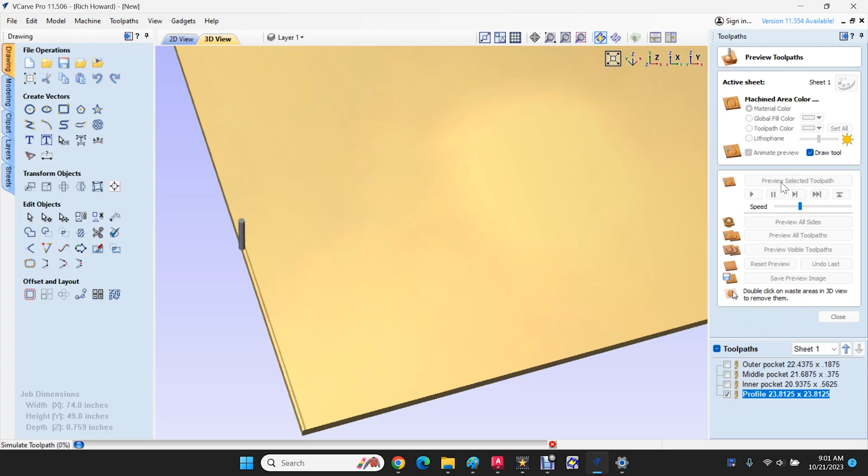Let's preview the selected toolpath. It's only showing me the one that I highlighted. That's 2 passes now. Coming up, 3.

And the reason I'm doing this is I don't want the board to shift much while I'm cutting it, because I don't have a great idea yet on how I'll fixture this. I'm probably going to have to add tabs, would be my guess. So that gave me the profile.

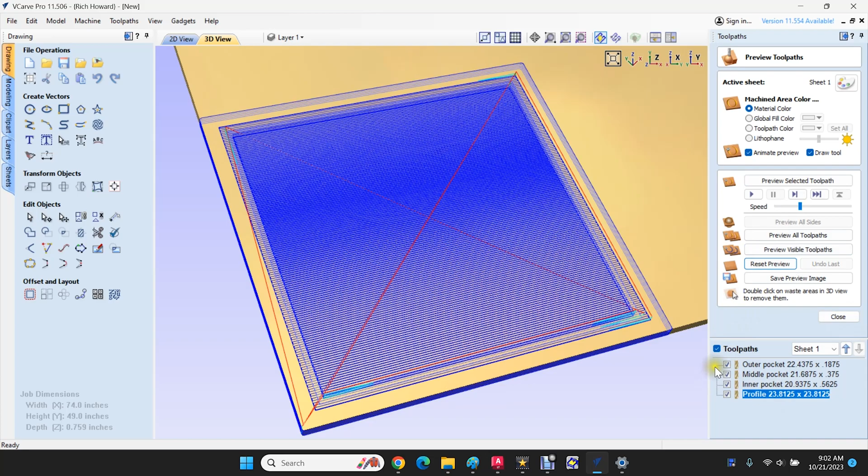So let's select all, and let's preview all toolpaths. It's doing the first one.

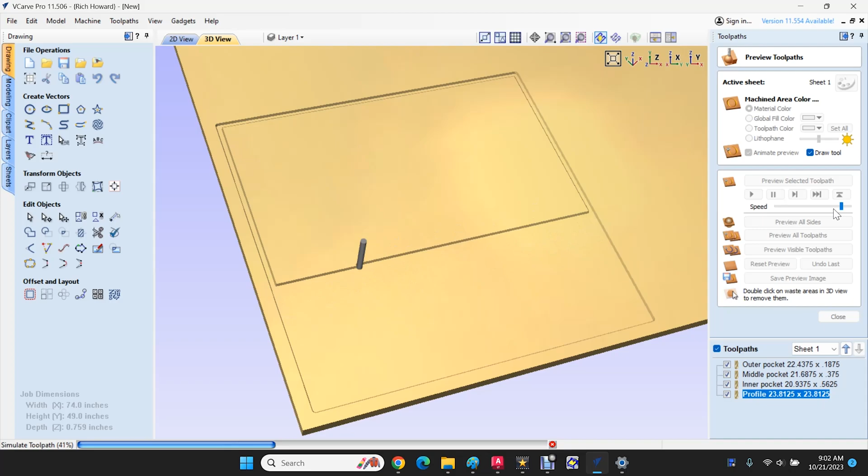And as my instructor, Chris Burns, said, basically 3D model it, double check it, triple check it. If it looks wrong here, it's going to be wrong on the machine. I don't know that those were his exact words, but that's certainly his message.

And then air cut, air cut, air cut, air cut. And I don't know a lot about Chris, and Chris Burns may have been like employee number one at ShopBot, but his knowledge is complete about the subject matter.

And the last time, I don't see that we're cutting anything here. Oh, because we're air cutting that part.

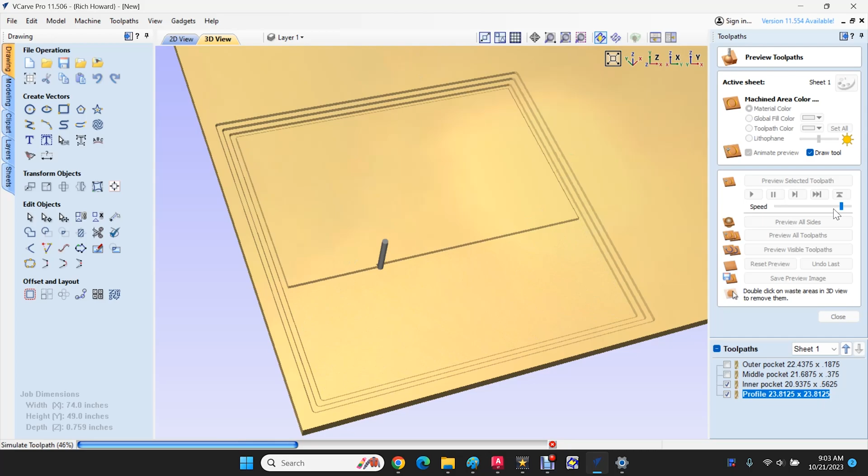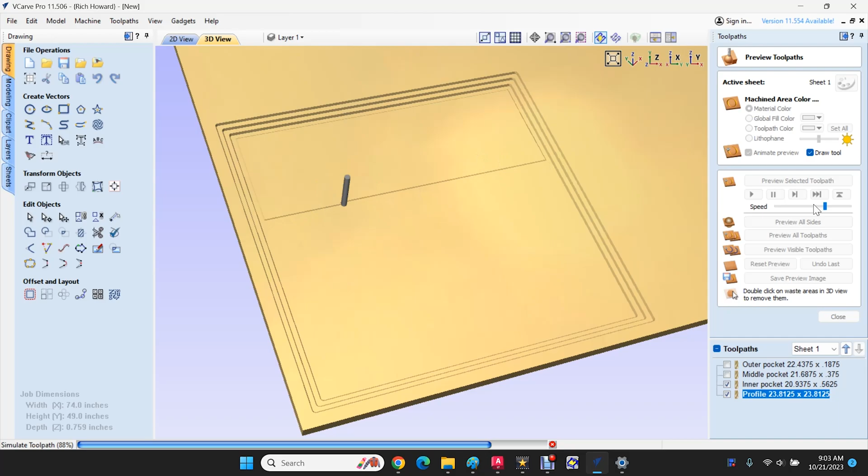And it impresses me how much he models it before he cuts. He does everything in 3D preview. He's air cutting. He's doing nothing until he's sure it works.

Now our profile, and that is our finished ceiling tile. Look at that. Okay, let's move forward.